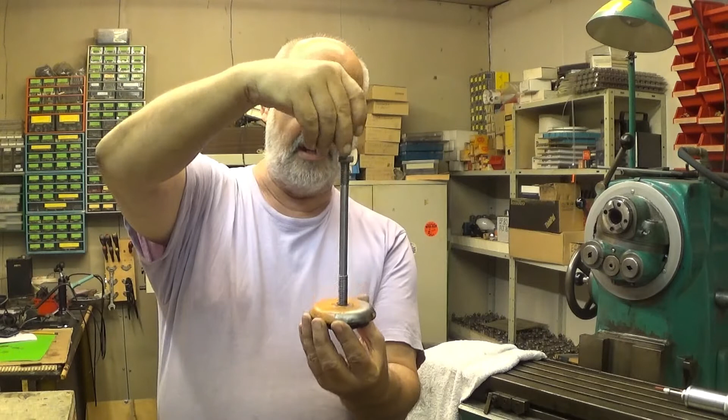I'll show you like that. In the pedestal there was this screw that screwed under the machine like this. Then you tightened this up with this nut from the top. Well, this is not an adjustable foot. These are not adjustable.

I will reuse these. Yes, they are really nice. They were a little bit dirty, but no more.

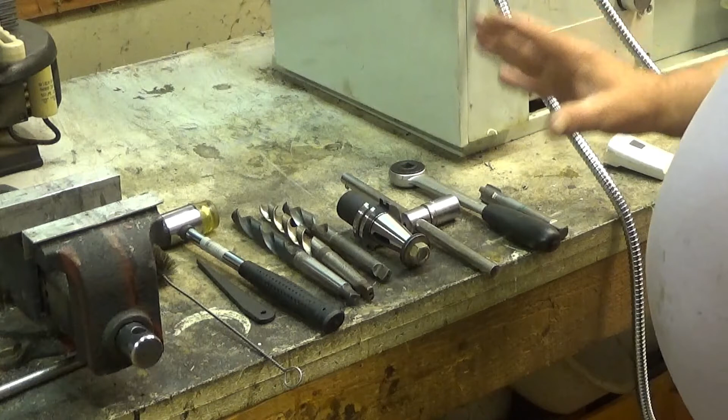Okay, let me show you the tools. Here are the tools I'm going to use with this thing. First of all, this one - it's a bottle brush. I'm going to clean the hole because there seems to be a lot of dirt in there.

Then I need this for my Morse taper to get the bore out of there. And then I have this hammer to hammer the drill in.

And then we have three: this is 18 millimeters, 18.5 millimeters, and then we have yet 19 millimeters.

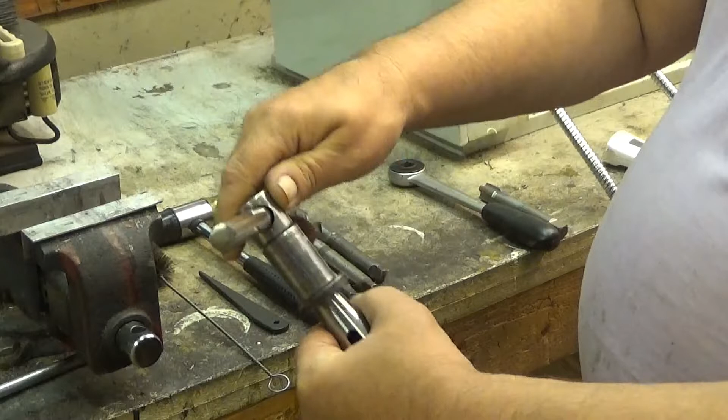And then, well, it's just a nut and a threaded thing in there, so this one can be driven by that one. You will soon see why I'm doing it this way.

First of all, I don't have the suitable machine for doing this, and then the place is not very nice to use a machine.

And after I'm finished, this is a tap which is M20 fine. And since I don't have a tap wrench of this size, I'm going to use this one.

As it happens, it's suitable, and you can use this one. Well, it should have two handles. I must be really careful not to break this one into the hole.

But yes, it's so big. Well, you can break anything. You can break it. Okay, so now it will be M20 fine, and the minor diameter - I tried to measure this out, and the minor diameter for this one is 19 millimeters.

I'm a little bit thinking if I should actually make it 18.5, but it is 19 millimeters, so it's 0.5 millimeters off. No, I have to actually measure and look into what the real diameter is for this one. Anyway, this is what I have been planning to do, so let's go on with this one.

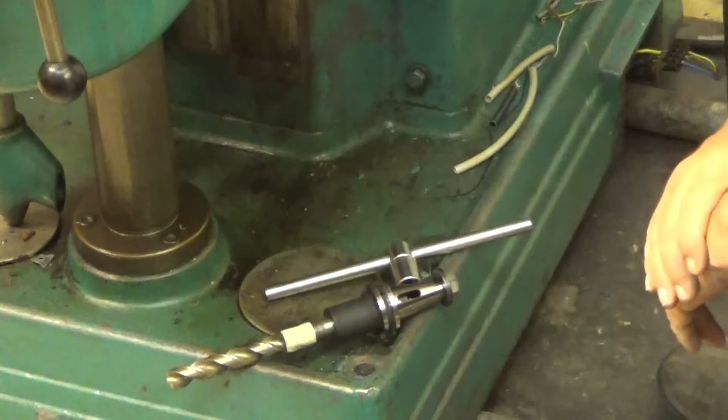Well, I already did the 18 millimeter hole through, and now it's 18.5 millimeters, and I have marked the depth where I want to go. Not a lot deeper than this - this is the amount of thread there will be.

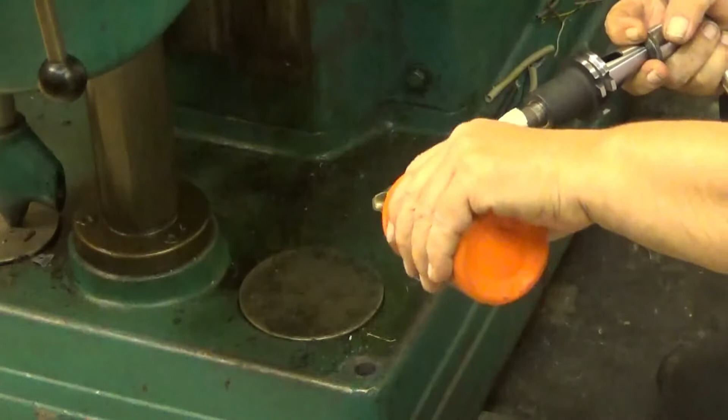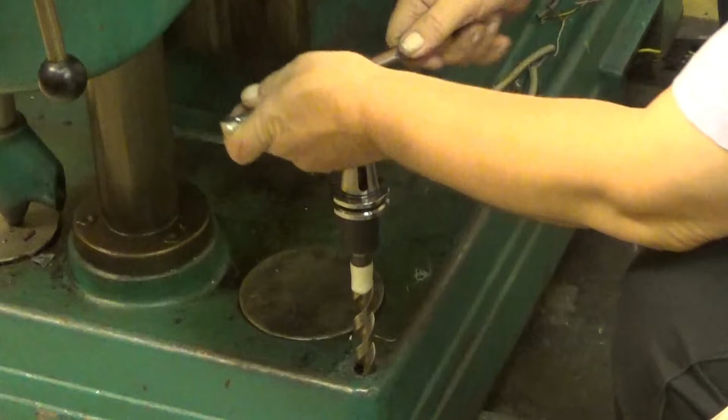Okay, and I already tapped this in with the hammer, and now let's bore it. From the first hole I noticed that this one, although it is cast iron, benefits from lubrication. I already started this a little bit, so yeah, now we go.

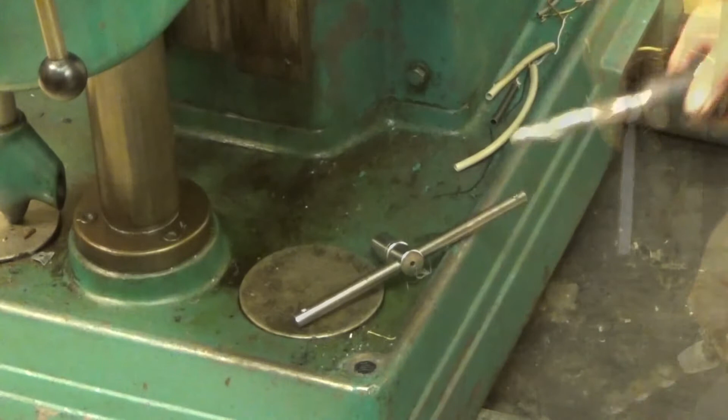And this is really laborious. There you are. Well, and this is now the 19 millimeters.

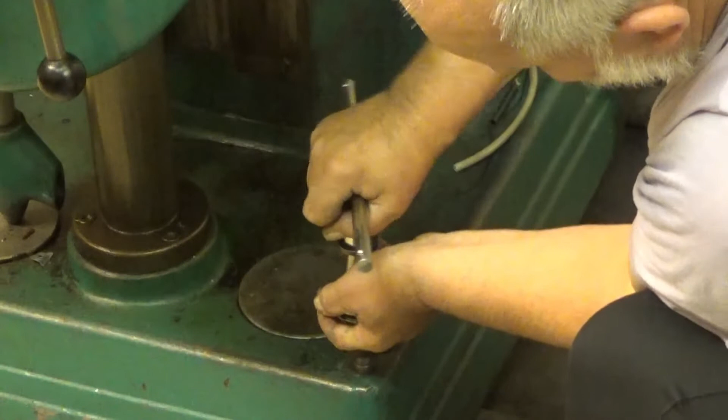I will go as far as it goes. Let's see what happens. Oh, this is as heavy as it can be. Yes.

Starting a thread like this can be a little bit tricky. This is a tapered tap, which is good because then you can use this manually. So let's see - you put it just here, and threading should be really easy. Yep, there is still a lot to go, this amount, and as you can see it's really fine.

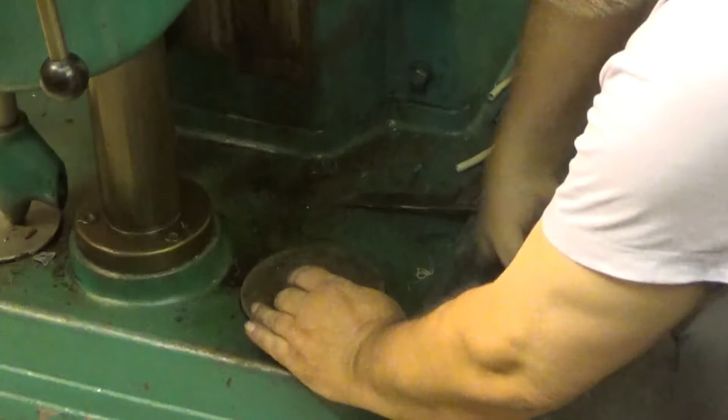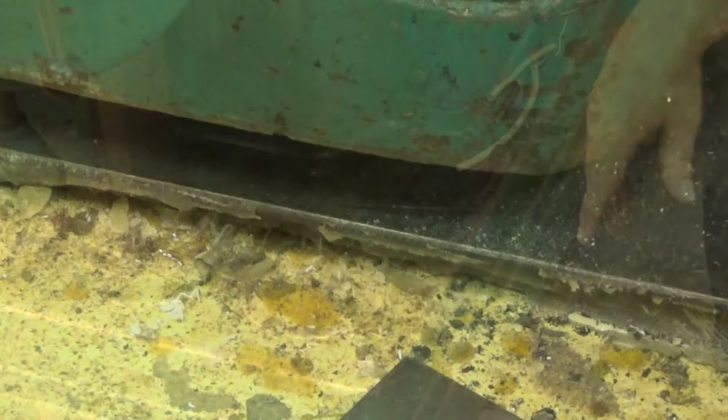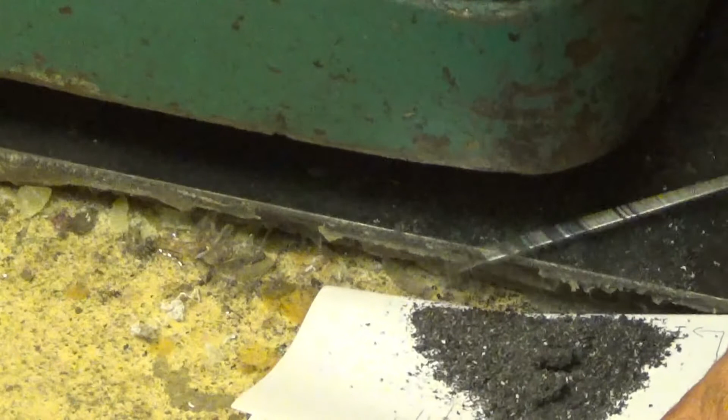There you are. And now the same procedure three more times. Let's see what kind of cuttings we get from there. This is material that was removed - not a little bit of it. Well, all the holes are now done, threaded, and no need to go to gym tonight.

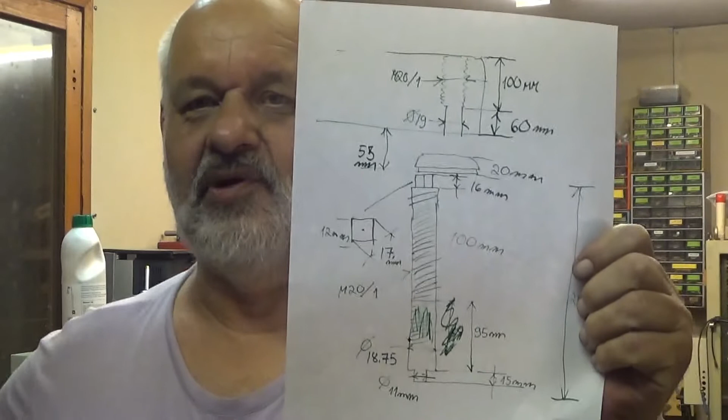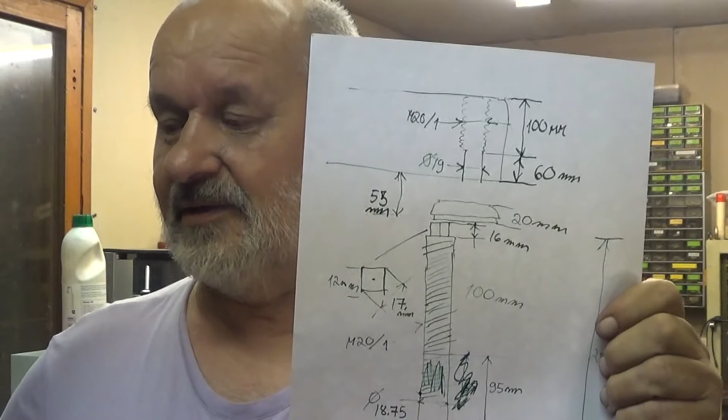Okay, here is my chicken sketch about what I'm going to do next. So here, this is how the milling machine, one of those holes, looks like. All four holes are like that. So it was originally a 19 millimeter hole, and for 10 centimeters, 100 millimeters, it is threaded to M20/1.

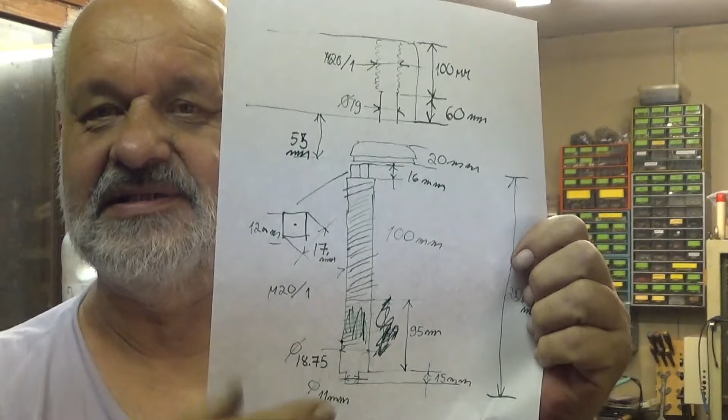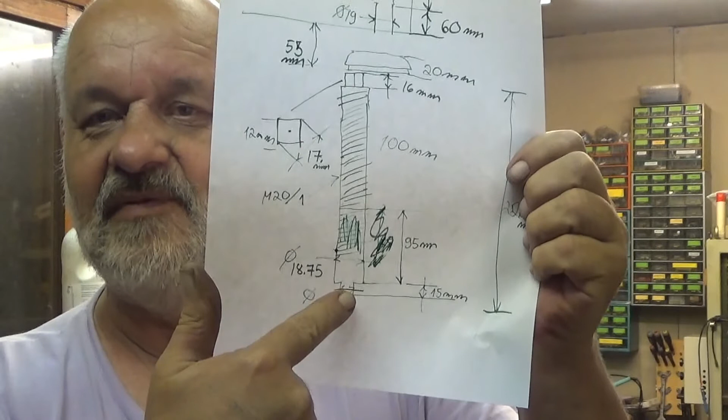So what we need to do is just a bolt, which is a little bit special. It has threads, at least 100 millimeters, and then it has a little bit smaller portion than the 19 millimeter hole in there inside, and then that one is going to be attached to the feet somewhere here - I have drawn it.

So the feet themselves are like this, nothing special about these. My plan is just to put it, let the threads and everything be there. The minor diameter in this one is 11 millimeters, M12 I believe, so it shouldn't be a problem.

Okay, and then furthermore we need a nut. Well, we don't really need a nut, but I would like to have one to test the threads, because we are going to do those by single point threading. I don't have the die for this kind of thread, and when the thread is so long, it becomes warm if you thread it with a die that long, quite easily actually. So therefore we are going to do that by single point threading.

And the material - this one, I already made one shaft out of this. This is really nice machining stuff. The test nut will be done from this. I cut a small piece out there.

This is going to be the test nut. So now I have already put this into the four-jaw - it's indicated. And now what I'm going to do, I'm going to clean up the mess from here, and let's see one more time that it's tight. Yeah, it's tight.

And now, well, let's face it - the speed - let's try that one. Looks good. Okay, important.

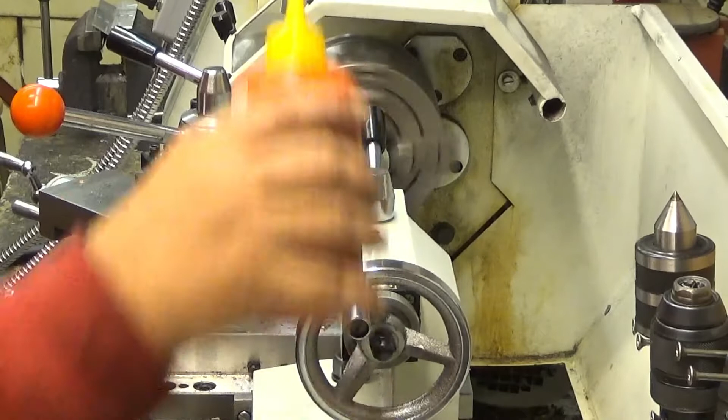Well, that's enough. That's about 5 millimeters. There you are - 19 millimeters.

Well, no chatter - that was something different. Oh yeah, I think this side is now ready. I will turn it around, indicate, and then do something similar to the other side.

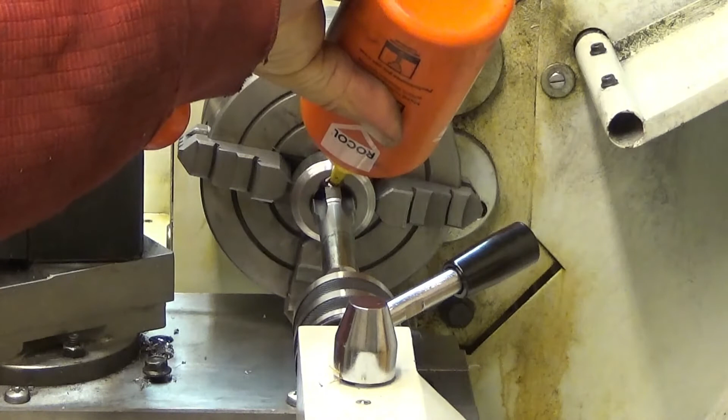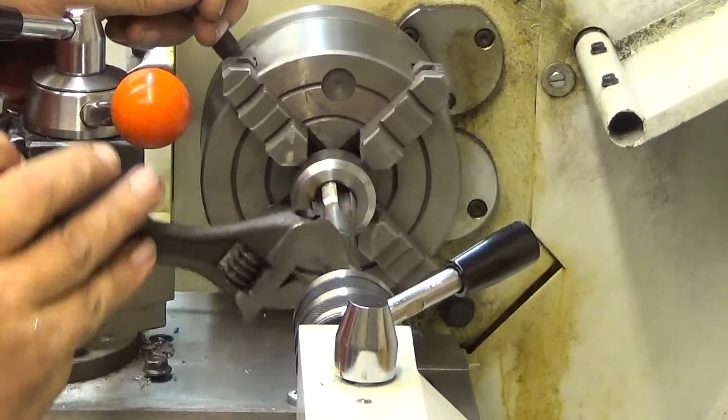And now the main feature, the threads - let's see. I don't have a spring-loaded center, so I need to do this this way. I'm a little bit afraid that it slips on the jaws - it's not very tight there. Okay, I'll switch to the vise.

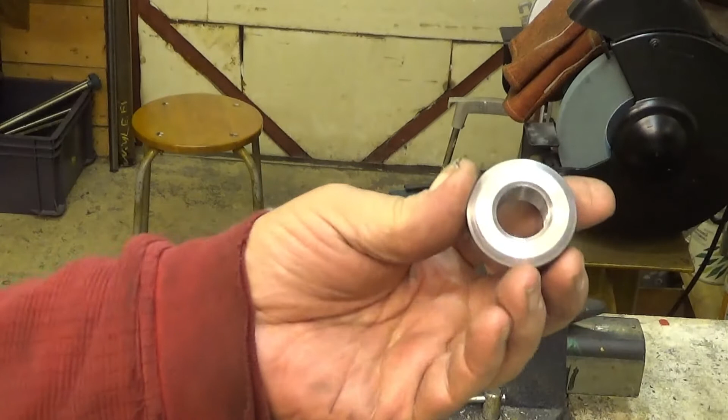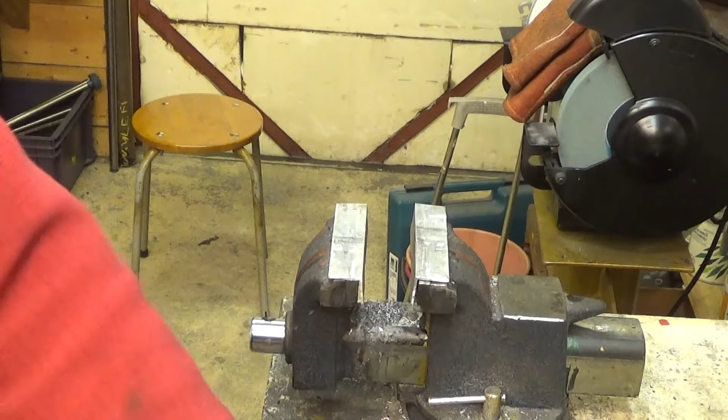Well, here it is, the test nut. One thing is missing from this one, and I will now do it - those fancy letters. Two. Okay. Ow! Okay.

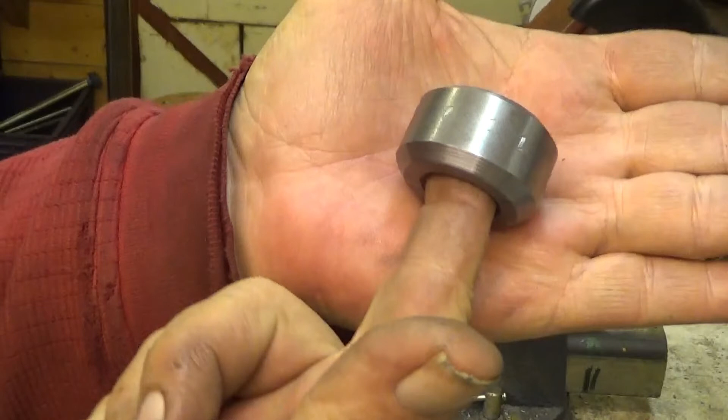So here we are - M21, and it's a test nut, alright, and I believe this is going to be in good use. Yeah, let's see.